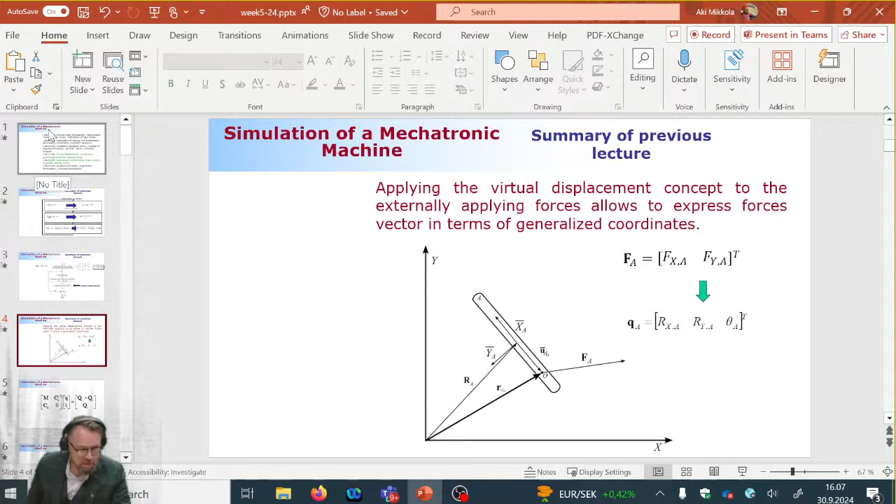Says what? You wish that? Ah, that would be fantastic. That would be really, really good. So then it will be just my head flying around.

Yeah, this is something that we can propose to university administration, that they need to get these green overalls and the green screen. That would be fantastic, so it's only the head that is floating. Hands, yeah, green overalls, that would be something.

Yeah, but even this is what we need to set up every single time. That green screen, even the green screens are missing in each of the lecture rooms. I don't understand why, because others are doing their streaming as well.

But yeah, okay, so let me see where I am here. So this. Oh, this is really good. That's really good. Yeah, the camera that is following me.

Yeah, oh yeah, this one is. Oh yeah, the cable is not connected. That's why. Okay, so let's see how we look in OBS. This looks good. YouTube.

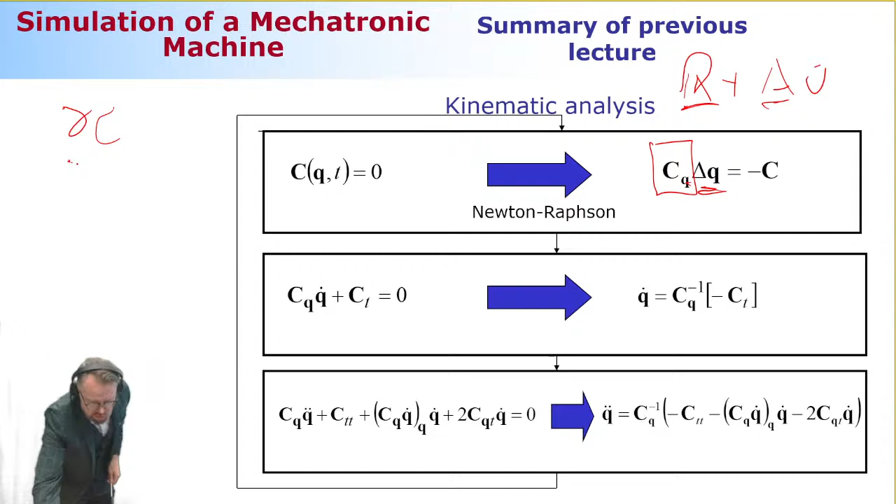And it works in a way that we compute something called the Newton difference. You can get the Newton difference once you've inverted your Jacobian. Here's another evidence that we have to have an equal number of equations and unknowns, because only in this case is the Jacobian matrix square in size. The Jacobian matrix - you get it by taking the partial differentiation of your constraints with respect to your unknowns.

You can only invert it if it is square in size. Then you're going to get the Newton difference. With help of the Newton difference, you can get a better guess to your position-level generalized coordinates. You redo it, updating your constraints and your Jacobian. You compute another Newton difference and get a better estimation. You do this until you're happy with how small the Newton difference is, or there could be a different kind of iterative process to close this out. But anyway, you do this until you're happy with the accuracy.

Then you move on to the next level, which is the velocity level analysis, the simplest of these three analyses, as it's only a simple substitution. Then you move on to the final level, which is acceleration level. That too is based on substitution, no longer as simple as the velocity level, but it's doable. So that's what kinematic analysis is about.

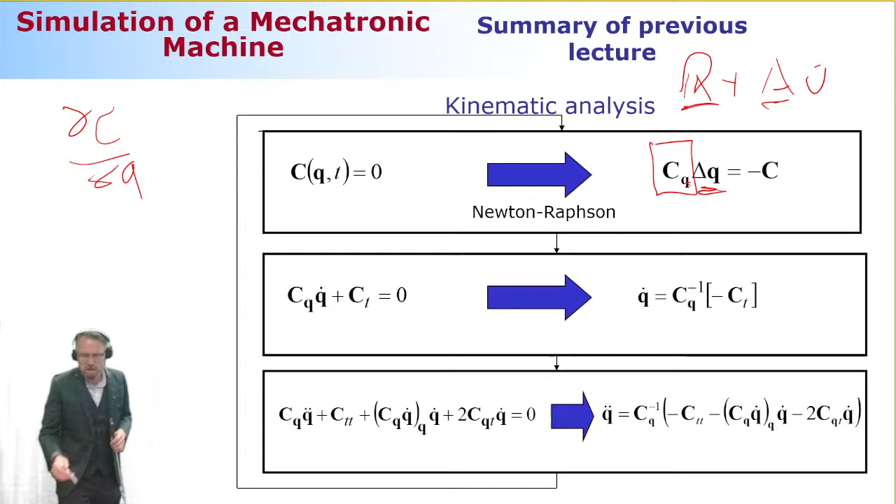And then you increase the time and redo it. So that's the way to solve it. This is the procedure at the position level, pretty much what I just explained, so I'm not going to do this again.

So then we moved to a completely different era, and that era was dynamics. We left kinematics behind and started to discuss forces. Remember, kinematics has no words about forces, it's just motion analysis. Dynamics is all about forces.

In simple terms, we have only two different kinds of forces. External applied forces, which could be like those coming from different kinds of actuators—hydraulic actuators, pneumatic actuators, electric drives—those are forces applied to the system externally. And then inertial forces. So these are the two different types of forces. In addition, we could also compute reaction forces due to the constraints, but let's leave those aside for now. Let's just consider that we either have external applied forces or inertial forces.

Now what we're going to do is set these two categories of forces to be equal, and that's going to give us dynamic equilibrium. Once we know the dynamic equilibrium, also known as equations of motion, we can solve these equations of motion forward in time.

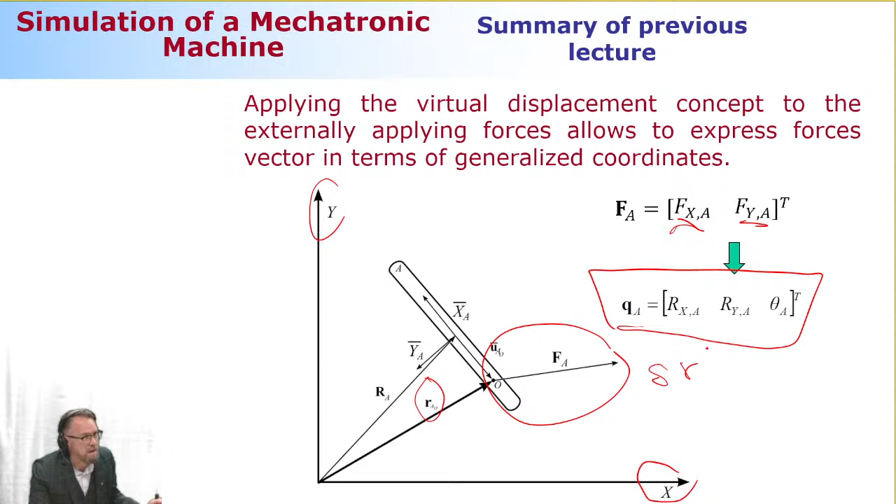What we're going to do here is introduce something called virtual displacement. With help of virtual displacement, we can create the relation between generalized coordinates and global coordinates. More accurately, it's actually the other way around, from global to generalized coordinates. It happens like this: once we introduce a virtual displacement to this guy here, we call it delta r, and we know that delta r can be written like this. Because of that, we know that r is a function of generalized coordinates, which in a simple case are rx, ry, and angle theta.

Okay, now following the mathematical rules, we can express this delta r such that it is partial r over partial q—this relation multiplied by delta q. Here's our relation. So this sounds like mathematics with no relation to real life, but yes, there's something important: this component here, this vector consisting of two components with respect to the global x and y axes—obviously the global coordinate system—can now be related to the generalized coordinates, and the relation comes from this partial differentiation.

Now with help of this mapping matrix, if you may, I can express this force in terms of generalized coordinates. There's going to be two in-class quizzes soon. First, I'm going to ask what the role of this mapping matrix is, that relates global coordinates and generalized coordinates—that's what it's doing for you. Then I'm going to ask you about a mechanism that is actually just one moving body—I'll give you several options, how is that possible?

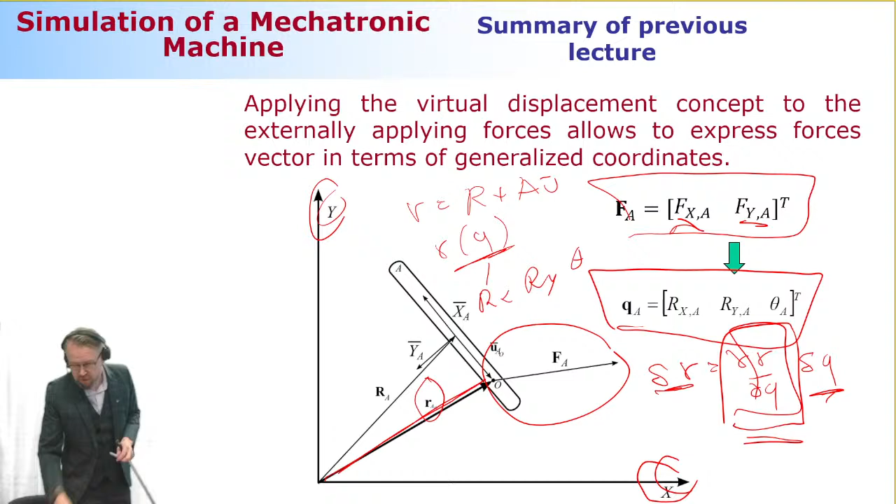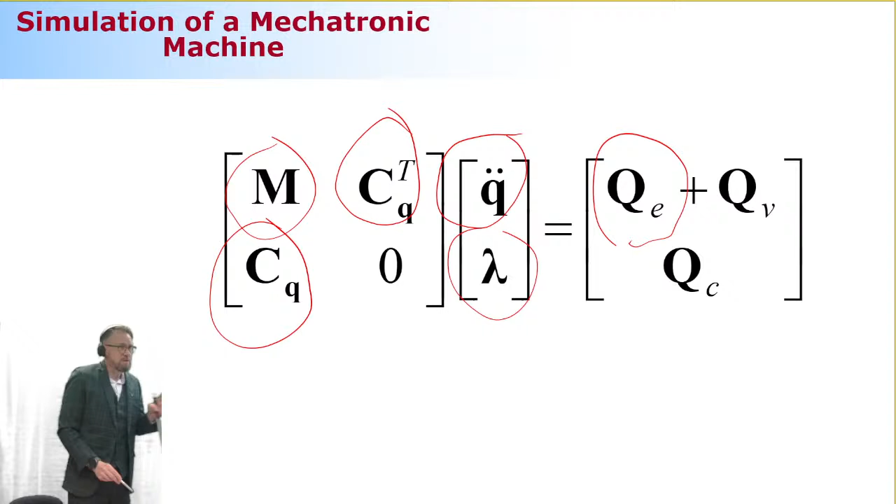We're still lacking a few components. We're still lacking this guy, which is a mass matrix. We're not sure what this Lagrange multiplier is, what its role is - we're going to introduce that next week, not this week. And then of course this one here, which is a quadratic velocity vector related to the mass matrix, let's say the inertia component. This is something that comes when we're converting this, when we express the equation of motion, so it's related to constraint equations.

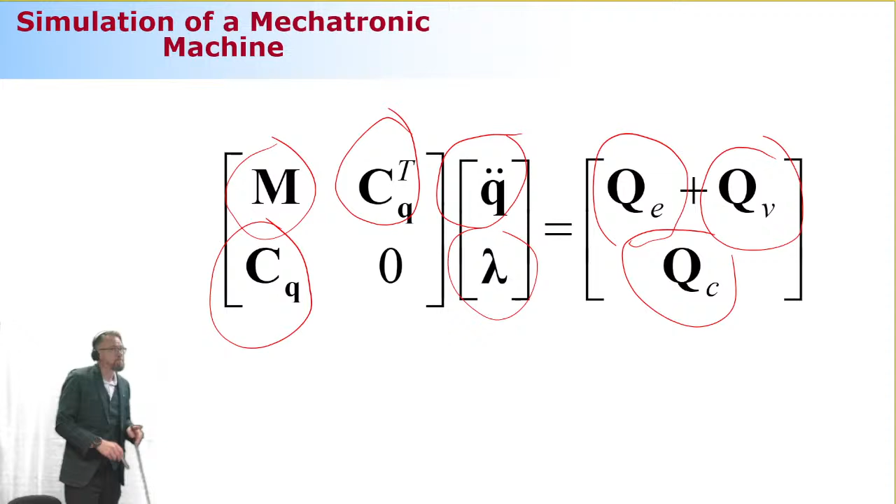Okay, those are the components. And now what follows is that we're going to redo the whole story about generalized externally applied forces rapidly, because I feel you need to hear this one more time. Once we're done, then we're going to practice it. Okay, one more time.

Here's the deal: we wanted to convert this force component to be expressed by generalized coordinates. We're going to do this using the concept of virtual work. The concept of virtual work is like this: virtual work equals the force multiplied by virtual displacement.

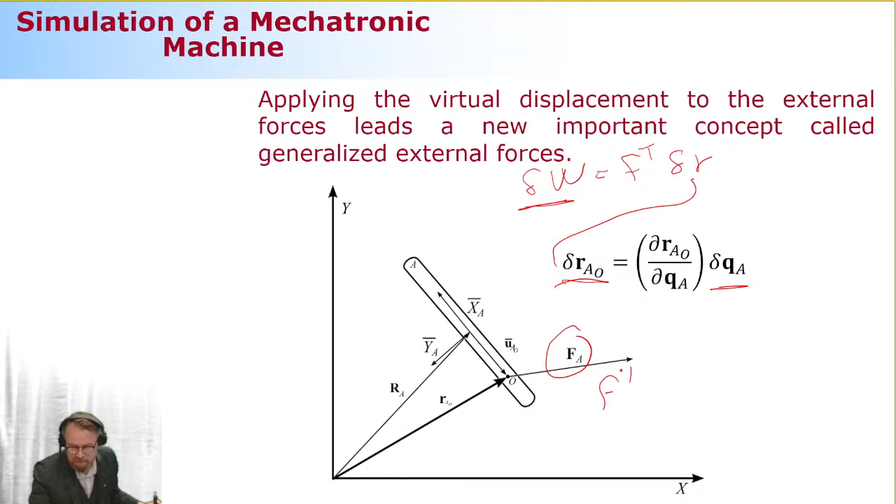A virtual displacement can be expressed pretty much like I just explained - there's a delta R, delta Q relation. Once you substitute this relation here, what's going to be left, and what's going to be your conclusion, is going to be like this.

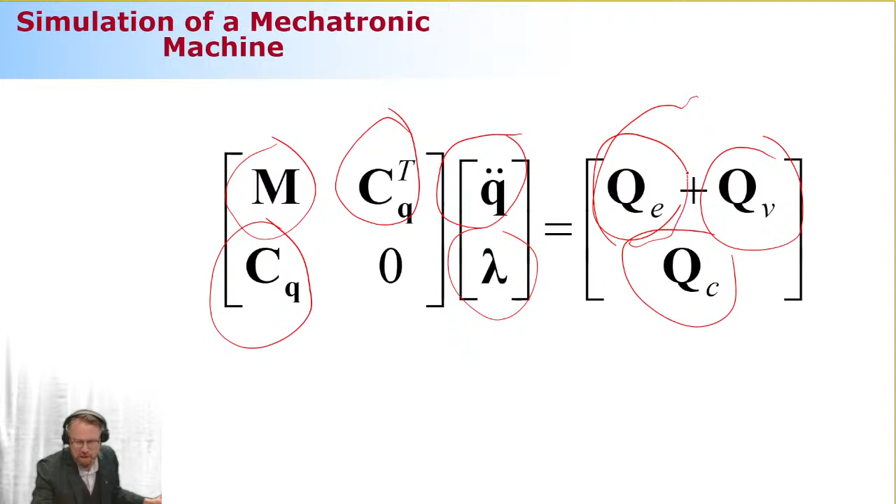Delta Q - now this component here actually takes your externally applied forces and expresses them in terms of generalized coordinates. So this is going to be called the vector of generalized external applied force. The one that you hear in the equation of motion is this guy, this one here. All right, so that's how it goes.

Now the middle step, or the component that is handy in the middle, is to do this differentiation. This mapping matrix, this magic mapping matrix, is partial R, partial Q, in detail as shown here, because this is going to simplify the notations in future.

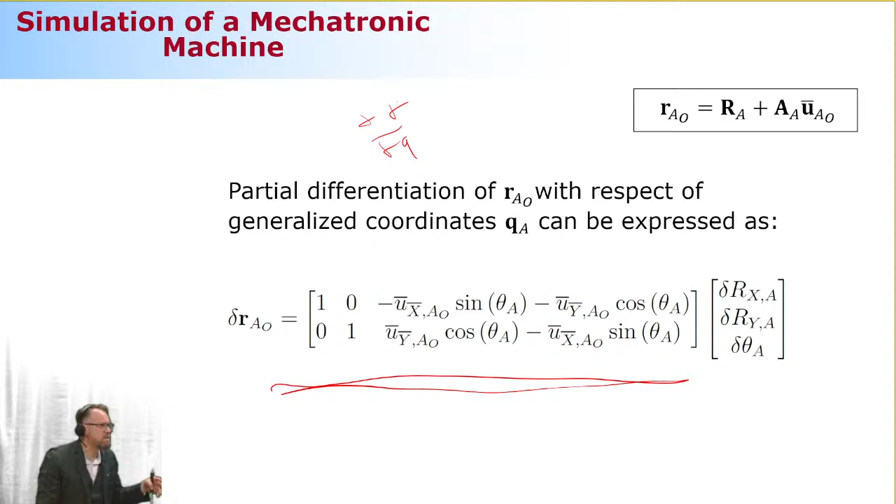And something that simplifies the notations in future is this matrix that we are actually familiar with. Remember, we met this guy when we discussed velocities. This is a rotation matrix, rotated 90 degrees in a positive direction. And then we have here vector U bar - this is a good friend of ours, so nothing new in that regard.

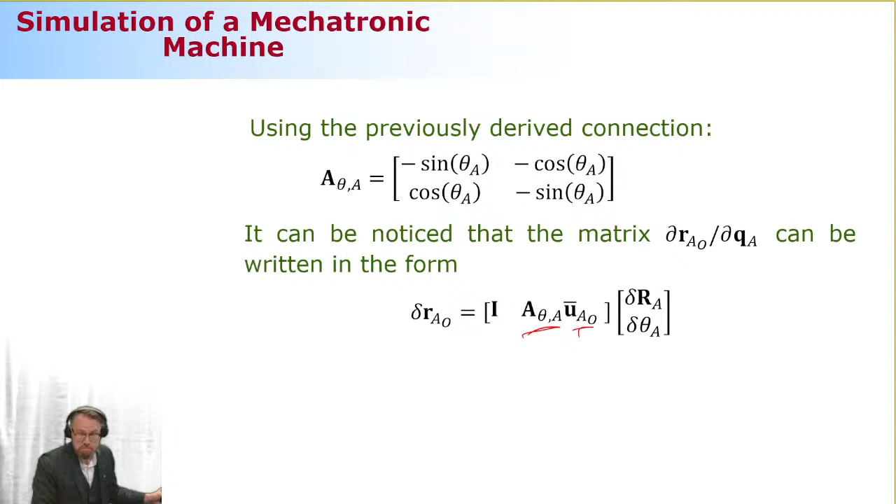That's it. Now once you multiply your force with this component, this is how it looks like. Now, a simple force component - give you an example like the beam-like component where gravity is applying here in the center of mass in the middle. This force will be expressed in terms of generalized coordinates, and how it's expressed depends heavily on where the body reference coordinate system is located.

Let's say that the body reference coordinate system is located in one end of the beam-like body, like here. What are you going to do then? You take this force and impose it to apply at the origin of the body reference coordinate system. And because there's a lever arm, this much, you take this lever arm into account by using this third component.

You see that this is vector U bar where the force is applying. This is the rotation matrix, rotated 90 degree angle, and the force. So this is obviously a moment that depends on how far off the force is from the center, or let's say the origin of the body reference coordinate system.

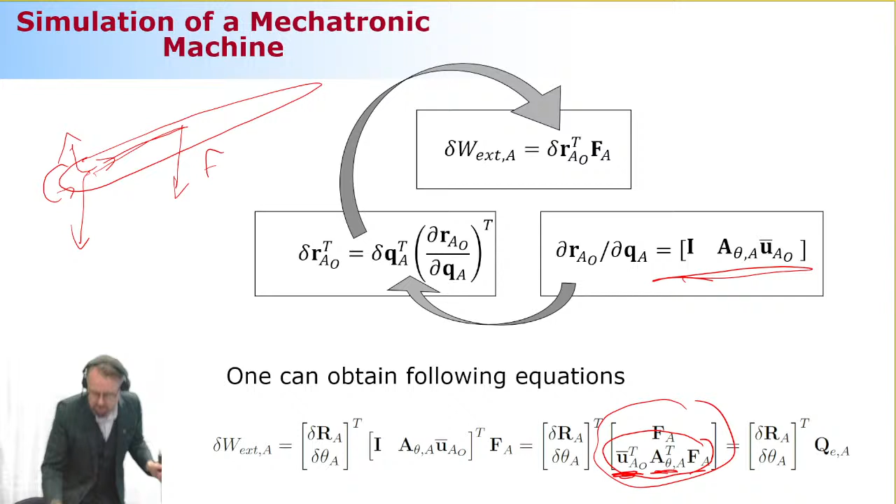So we're kind of moving the force applying at the origin of the body reference coordinate system, and we take the moment into account. And the moment is lever arm multiplied by the force itself. The moment is always a scalar component. This one here, when you do the math, it is actually a scalar component. This is a vector, exactly the one that the force is applying wherever it is applying. So that's what it is.

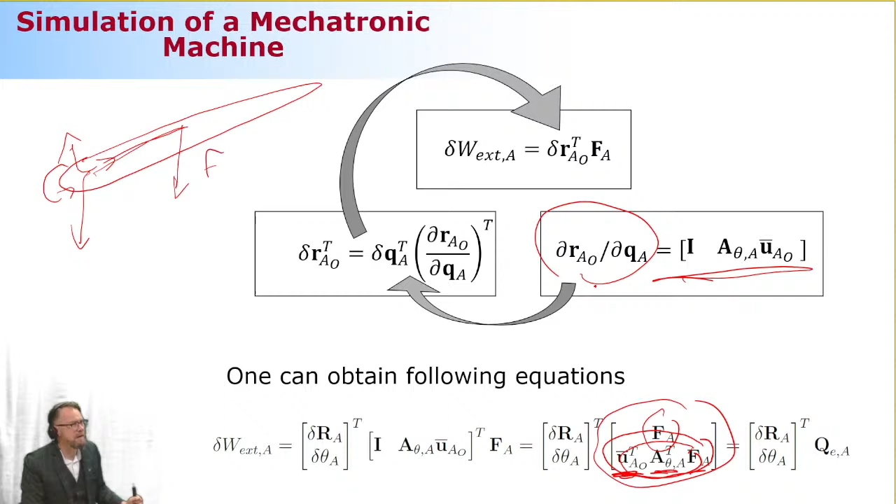So let's look at this one more time. The mathematical component was this guy here that relates global coordinates and generalized coordinates.

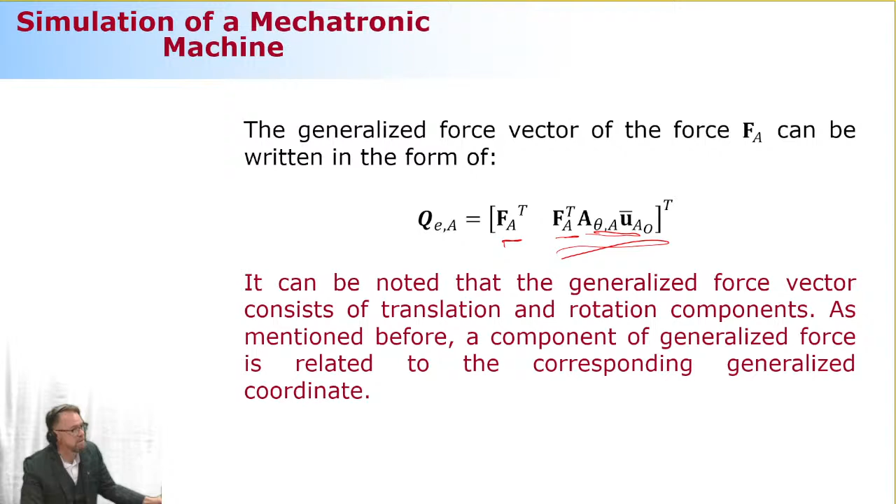So here are the forces. If I have the force applying at any particular point in the body or even outside of the body, these are the two force components, and this is the moment. So this is actually a scalar component once you do the math. It's clear because this is going to give you a vector, and this is going to be a vector. So what is left is going to be the scalar component, the moment. Maybe that's something you're more used to dealing with.

All right, so my first in-class quiz is this: physical interpretation of matrix, partial R over partial Q, in case of virtual work. The options are: defines relationship between global coordinates and constraints; defines relationship between constraints and generalized coordinates; defines relationship between global and generalized coordinates; defines relationship between external applied forces and constraints.

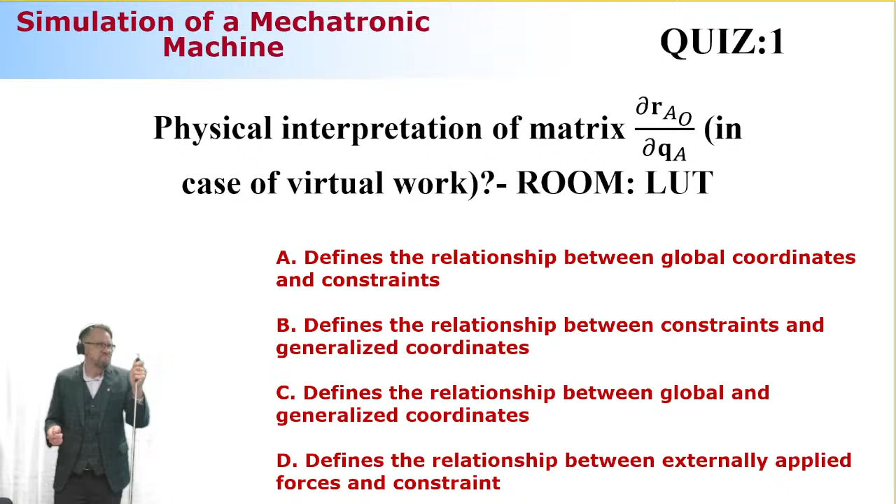All right, let me revisit that in a moment. Let me continue the story here. Let's look at an example. Here is an example which is pretty much what I explained to you. So I have here a beam-like body. There's gravity applying at the center of the beam-like body. And the body reference coordinate system is not located at the center of mass - it's outside of the center of mass.

Okay, so let's compute the vector of generalized forces. It's going to be obviously this force component as it is, the two first components. And then what is going to be left is the moment arm. Moment arm that is going to be a function of the rotation coordinate, obviously. Because if the body is rotating like this, the lever arm will be 0, as is also the case.

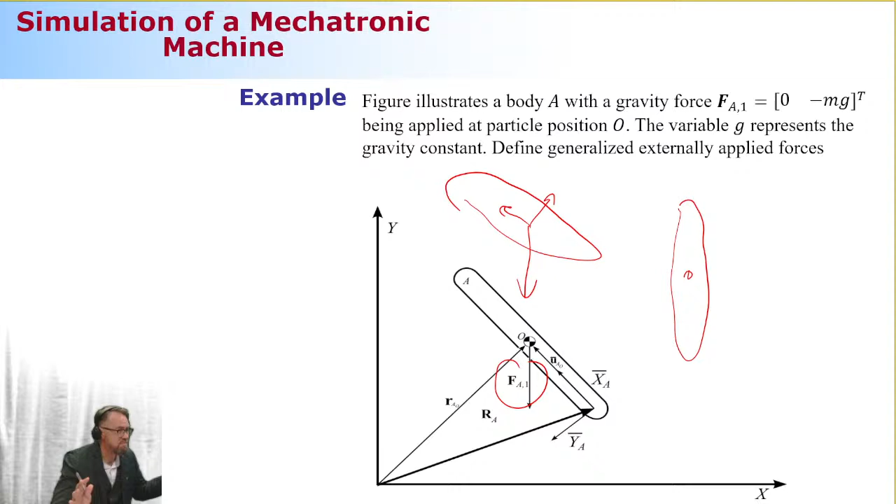If you think about it, there's a beam-like body, sorry about the low quality of the drawing, and the body reference coordinate system is located in the middle, and gravity is applying here. The moment arm will be 0, because the lever arm is 0. Okay, all right, so let's continue then.

All right, so here is the equation that I learned from the previous equation. So I have my rotation matrix that is rotated 90 degrees angle, and then the vector u bar. So this is a clear, simple matter of substitution. So once I do the substitution, I'm substituting the vector u bar into this equation. Vector u bar, by the way, because the body reference coordinate system is here, and the x-axis is pointing upwards, is going to be L divided by 2, 0. And once I do this substitution, my mapping matrix reads like this.

Once I do the math, you see that, okay, I got 0 component in the x-axis direction, which makes sense. Mass multiplied by the gravity constant as my y component, in the minus direction. And the lever arm, that depends on what the orientation is.

So how far off travels this force? If it is like this, it's going to be maximum length, which is L divided by 2. If it is like this, it's going to be 0 because it's traveling to the origin of the body reference coordinate system. All right, that's what it is. Now, what about this?

What about this case? What if I'm going to have the exactly same body, but the difference compared to what we looked at a little while ago is the fact that now the body reference coordinate system is located at the center of mass. So you need to take a look at how big the lever arm is, and then you need to pick an option where there's an appropriate number of components. Here's a hint.

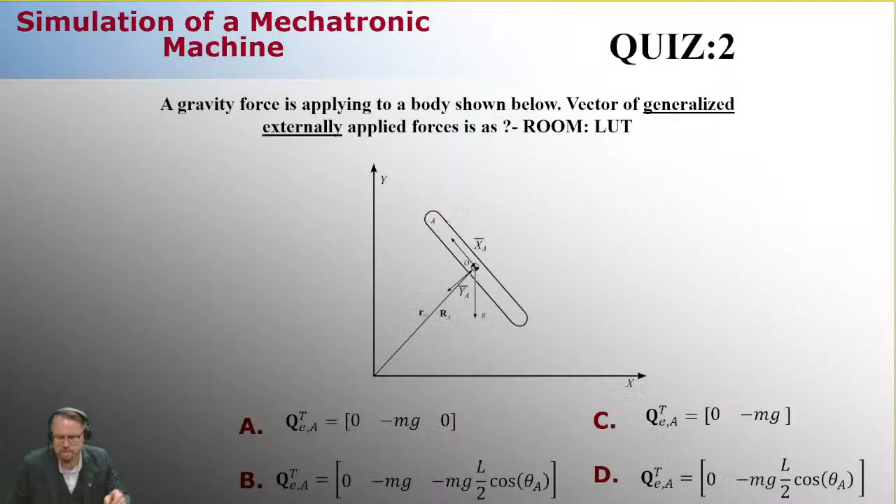Okay, let's continue then. Let me show you another example, and then we're going to move on to these inertia components. Ah sorry, this needs to be this order. So first this one, and then this one. Right.

Okay, let's look at another example. We have here a body that is triangular in shape. This is a little bit confusing example because forces that are applying in two corners of the triangular shaped body are expressed in terms of global coordinates. So you need to understand that they're pointing this direction no matter how is the configuration of the body.

It's pretty much like if you have here a point force like this. Even when I'm rotating the body, the point force still remains the same orientation. So it's like this kind of configuration. That's how it behaves, all right.

Now I have one force applying in a corner called A, and then another force applying in a corner called B. So what I need to do is express these points using the kinematics that I'm very much familiar with. I'm going to do this in a hard way - express this point and this point using this kinematic equation.

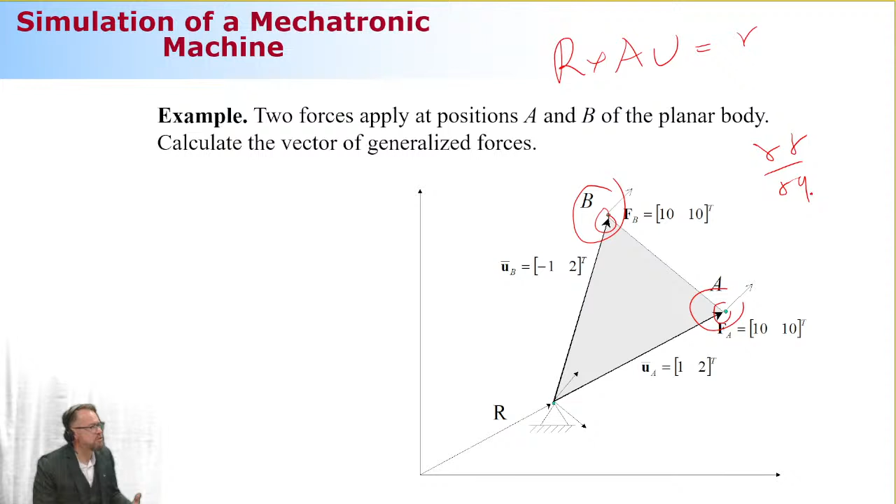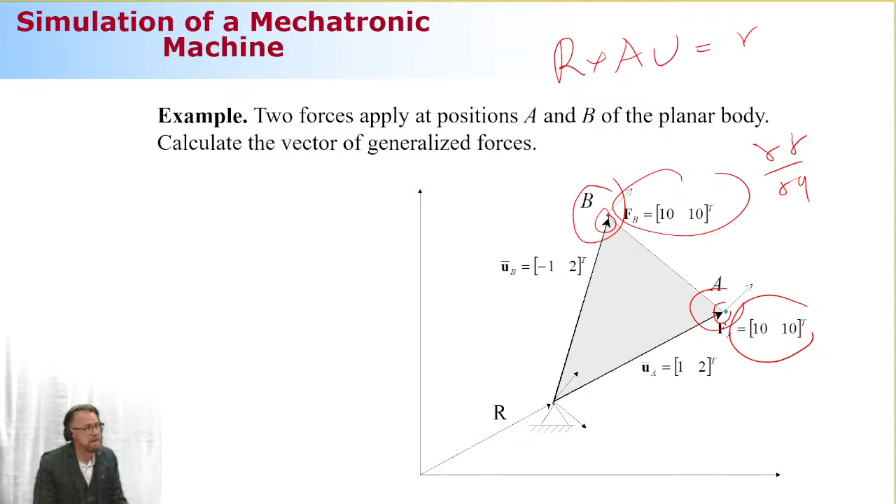What I'm going to do afterwards is differentiate this, which is called r, with respect to my generalized coordinates, and it's going to give me this magic mapping matrix. What is left to do is multiply my forces, this one and this one, by this magic mapping matrix. I'm going to get two sets of forces that I just need to sum up because they're applying in the same body. So that's what I need to do.

Okay, let's continue. The first thing will be kinematics at the point - this corner here, how can I get this? It's going to be very simple. I can take the components from the vector u bar, simply substitute it here, so 1 and 2, and then this is my rotation matrix, my A matrix. So this is the two components that I'm going to get.

Once I differentiate that with respect to my generalized coordinates - one more time, generalized coordinates are Rx, Ry, and angle theta - I'm going to get this kind of mapping matrix. This consists of 2 rows, 3 columns. 3 columns because of 3 generalized coordinates, 2 rows because of the 2 global coordinates.

Okay, now what is left is that I need to map my forces with the help of the mapping matrix. I'm going to get the 3 components - components as they are, and the lever arm, let's say the moment component, moment component would be the better way to say that. And that's it. Then I redo the same, but for point B.

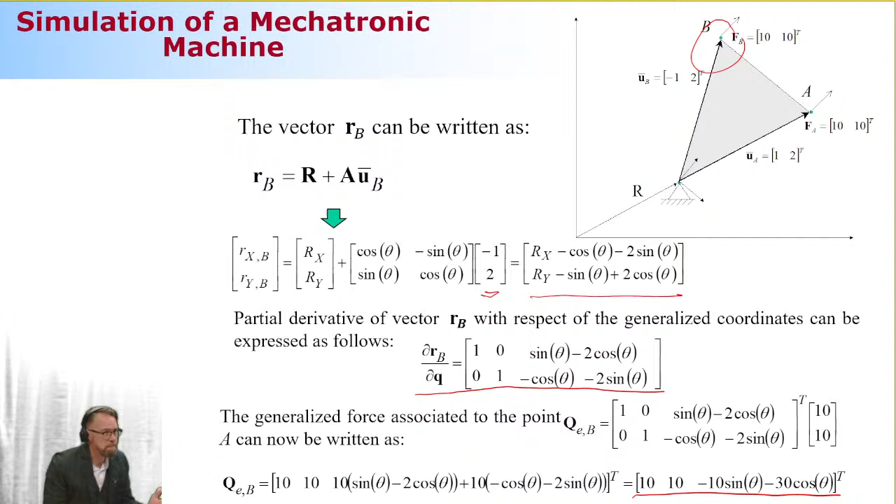The point B is located here. Actually, the only difference here is that the vector u bar will be different. So here's my vector u bar, and this is going to give me 2 components. Once I differentiate that with respect to my generalized coordinates, this is going to give me a second set of externally applied forces. They are applying in the very same body, so what I need to do is sum them up. Once I sum that up, this is how it looks.

My first component, second component. So this is my finally generalized externally applied forces. Very, very mechanical - take a look at the number of components, that's what matters the most.

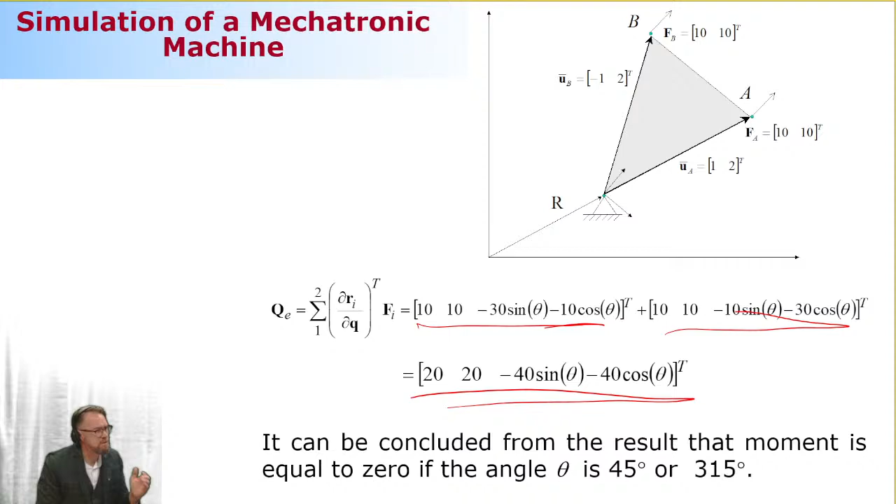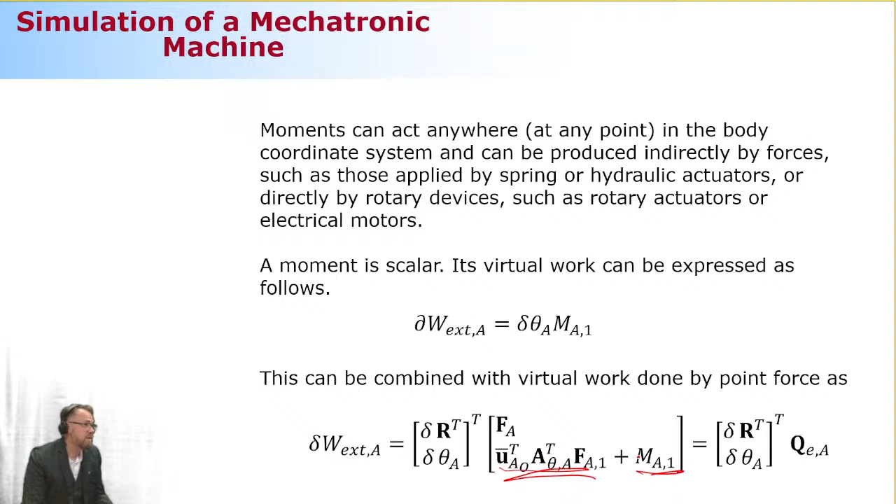Okay, simple thing - the moment. If there is a moment, that's going to be simple because any moment you have in your system, you just add that to your third component, your angular component. So a moment, that moment, you can move as you want. If you have any additional moment, you just sum it up, whatever is your lever arm. So it's a pretty straightforward component.

Okay, now, moment of truth. You guys ready to see something that is going to give you nightmares about this stuff, years in, years out, after I introduce this to you, because it's going to be so complicated that there's no limit. You're ready for that? You're absolutely ready for that. Okay, what about this? You still have a can-do attitude.

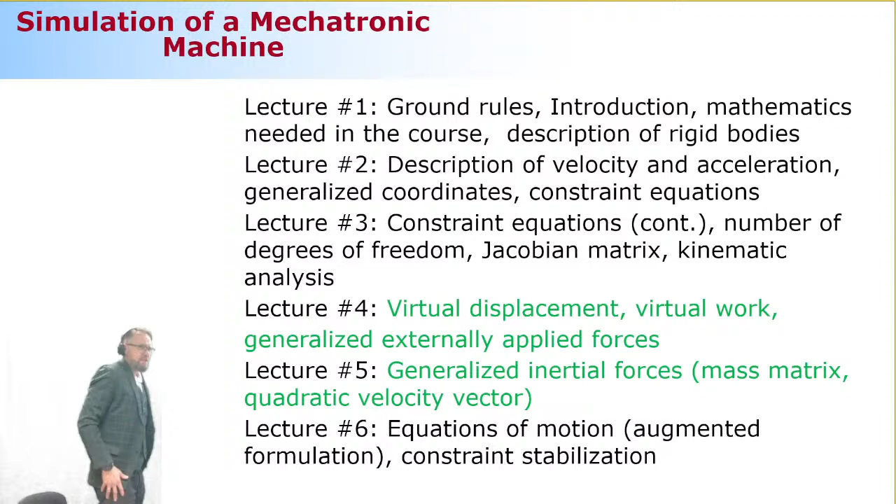Okay, so let's get into the topic. So it becomes to be this serious. Okay, so...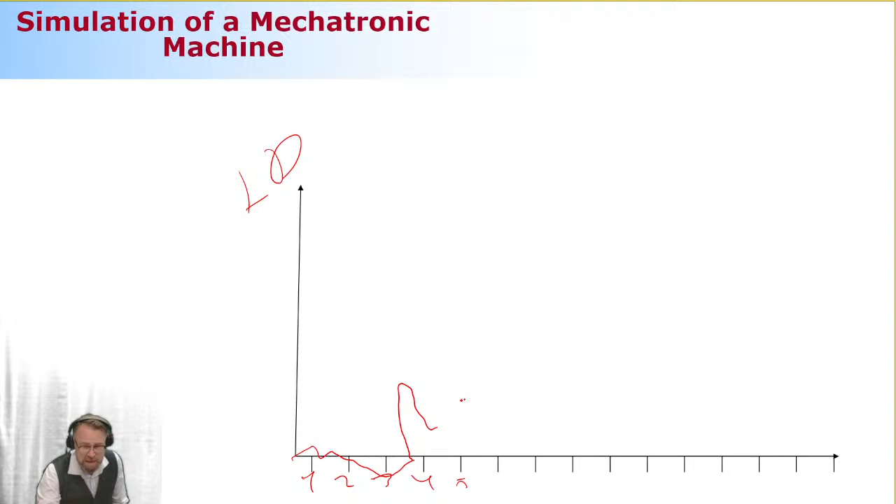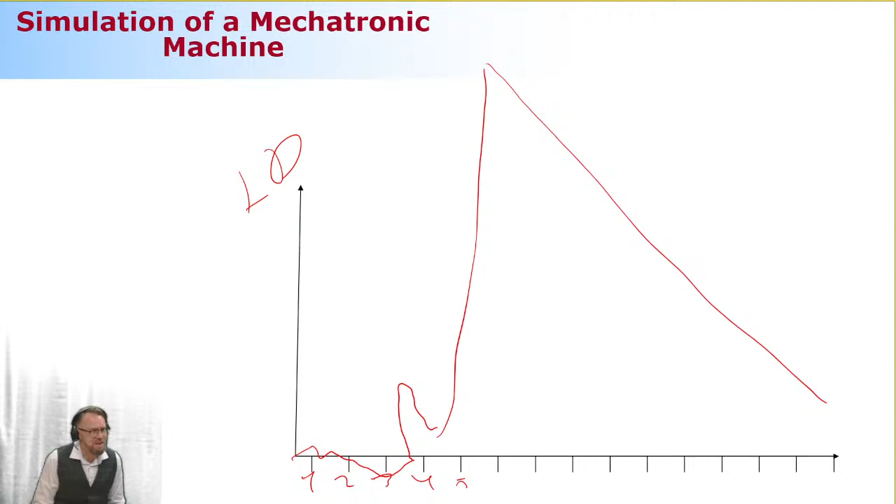Generalized inertia forces, that's what we're going to do. The concept, well, this is a level of difficulty, LD, level of difficulty. These are the lecture numbers, 1, 2, 3, 4, 5. We started like this, sometimes negative. This was a little peak because of the kinematics. And now here's a summit, we're going to go to the top of the summit, and the rest is like this. Very, very enjoyable, downhill all the time. Soft stuff.

Okay, here's a mission, this is what we wanted to do. That inertial force is, like we discussed earlier, mass multiplied by acceleration. Now, acceleration, sometimes you have seen this, that the force is mass times A, this is standing for acceleration.

And when you look at your lecture notes from your bachelor level courses, here instead of A, we're saying R dot dot, but there's no difference. And instead of mass, we want to show off about how good we are in physics and mechanics. So instead of saying mass, we say that the mass is equal to the integral over the volume of the body and the density.

That's going to be our mass. This is kind of important because remember where we started: there is a body like this, and the body consists of particles. So what we're doing with this volume integral is collecting the information from each of these particles. What we really want to know from each particle is its density - once we know that, we can compute the mass. This is maybe an overly complicated way to say mass, but just for the sake of generality, it is expressed as a volume integral. Okay, you're still with me?

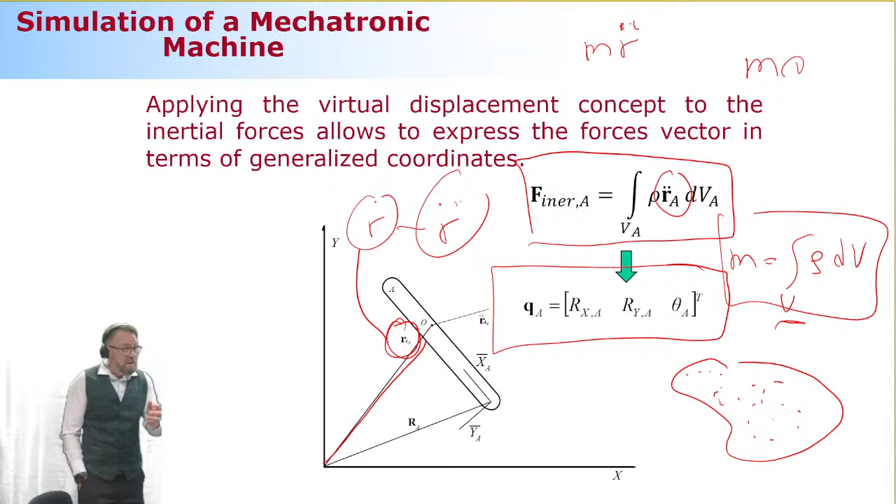So that's not what we're going to use here, because we have to convert this to be expressed using generalized coordinates. So how can we make this happen? Of course, we're going to use our good friend D'Alembert. D'Alembert, we discussed this earlier - what D'Alembert was saying is that inertial forces can be treated exactly the same way as external applied forces. Exactly the same way, really? So if that's the case, let's treat them exactly the same way. Let's use the concept of virtual displacement, virtual work for this other type of force, and let's compute how the generalized inertial forces relate based on that concept.

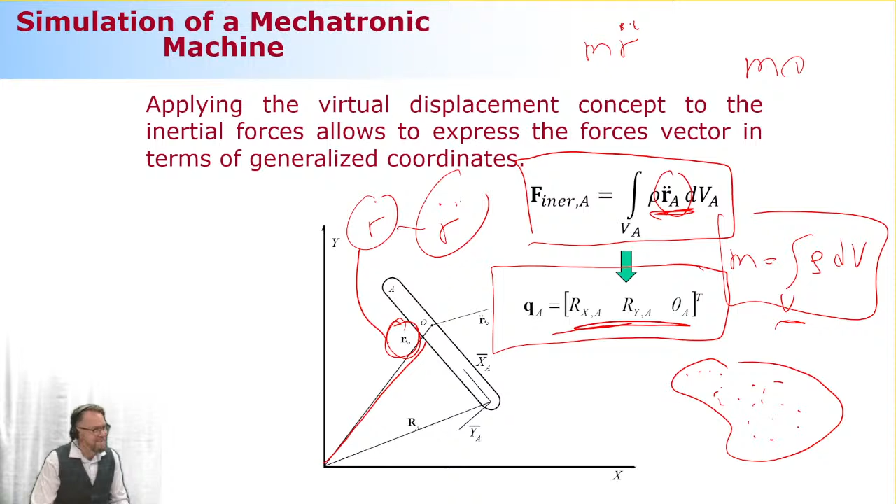So this conversion from 2 components here to 3 components here is going to be based on virtual work, virtual displacement to be more specific. Okay, let me take a look. So it's still a few minutes before the break - we're going to get started, then we're going to have a break, and then you guys relax and come back. But you know what we're aiming for here, you understand what we're aiming for today.

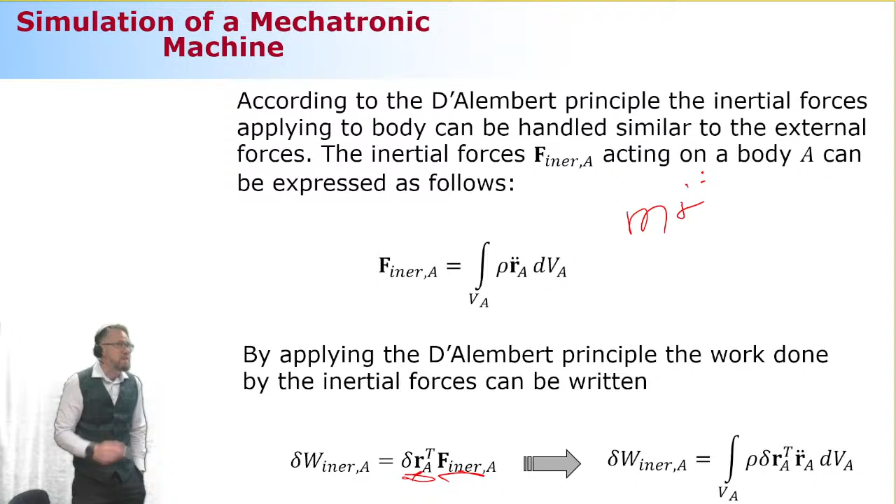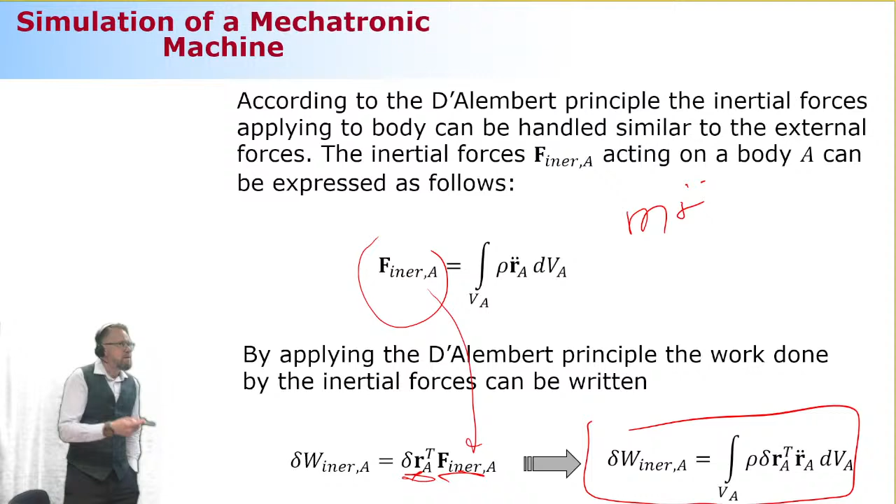Okay, that's clear. All right, so it's mentioned here that following D'Alembert's principle, the virtual work done by inertial forces can be expressed as virtual displacement times inertial forces. And inertial forces is nothing but mass multiplied by acceleration, like this. So I'm going to substitute that information here, and this is how my virtual work done by inertial forces looks like.

I continue my story. Then I'm going to use this relation between the global and generalized coordinates - this relation we discussed earlier, the one coming from mathematics that relates delta R and delta Q. The relation is this magic mapping matrix. So once I introduce this mapping, I'm going to get something called generalized inertial forces. And generalized inertial forces is the volume integral over the density, by the mapping matrix, and then acceleration.

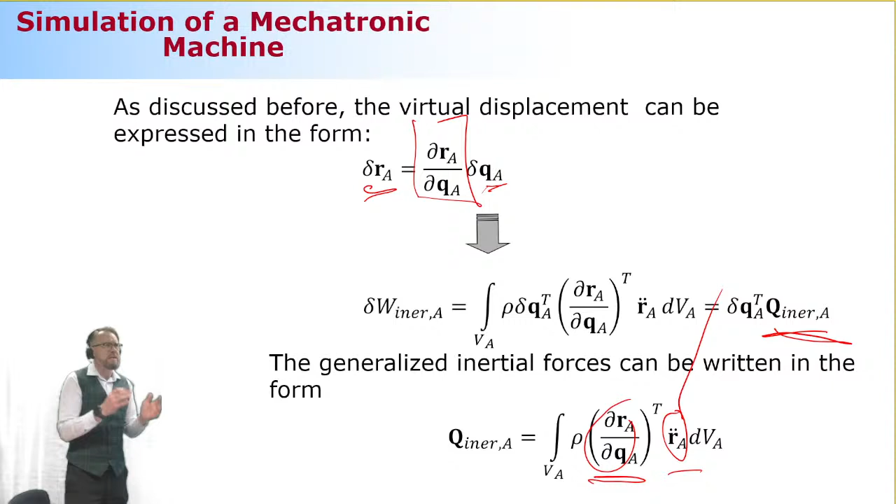Now this is not great yet, because what I'm after here is my generalized coordinates. And generalized coordinates are unpleasantly hidden in this component and here too, they are not explicitly expressed. This makes it hard to solve the equation of motion because I need them explicit. So I'm going to play with the math.

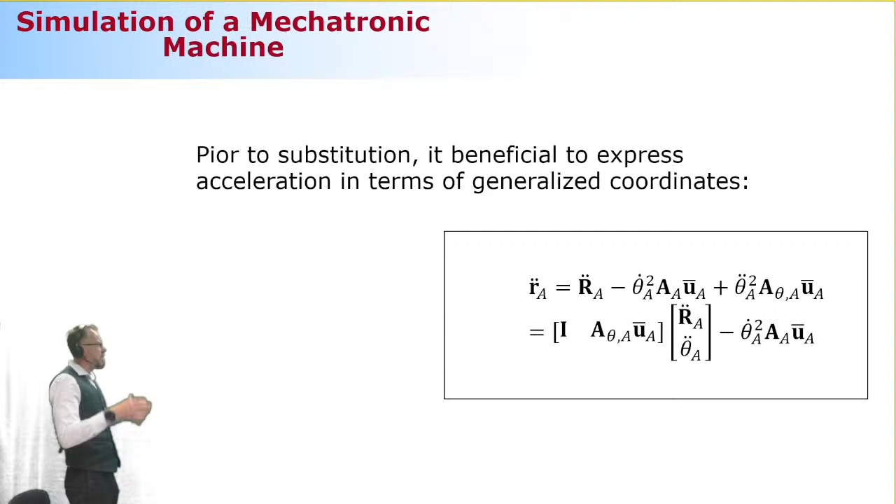First, I'm going to express my acceleration by reorganizing my different components. We learned, I think in the second class, that acceleration consists of three components: translational acceleration, and angular acceleration multiplied by this rotation matrix that is rotated 90 degrees, with the U bar. Oh, this is a typing mistake - the two definitely shouldn't be in this equation.

And then this one here - I think there is another typing mistake here, this one, my apology, because this obviously... Oh no, no, there is not. That's how it is. That's how it is.

Okay, now I'm going to express this by putting my generalized acceleration components as their own vector, and whatever is left will be a matrix multiplied by my acceleration. The last component left is the part quadratically related to velocities. So this is just reorganizing my acceleration, okay?

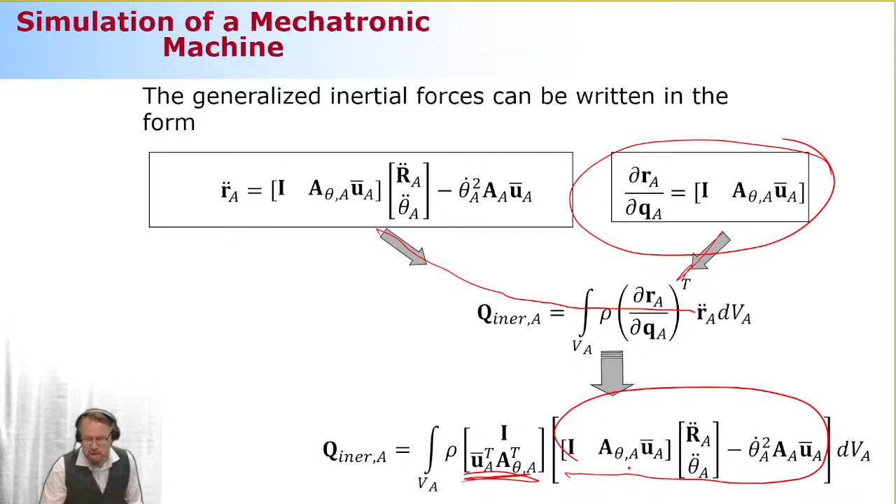Now I'm going to substitute this reorganized acceleration into this equation, and also substitute this mapping matrix. When I do this, this is how it looks - this is my mapping, this is my acceleration. When I do the math, there are two components: one called the mass matrix, linearly related to my accelerations, and something called the quadratic velocity vector. This is my generalized inertia forces.

You see the mass matrix is related to my generalized coordinates, so for one body, the mass matrix will have dimension 3 by 3. The quadratic velocity vector is something we don't need to worry about this time - let's get back to that later. There are ways to simplify it. For your information, the quadratic velocity vector becomes a zero vector if the body reference coordinate system is located at the center of mass. But it doesn't need to be there - certain commercial codes prefer not to put the body reference coordinate at the center of mass. That's their choice.

Okay, so that's what we're going to look at next. But first thing will be... guess what? Yeah, break. Let's have a break. Then we're going to look at what are the components inside the mass matrix, and how the quadratic velocity vector looks. That's going to be everything we need to do today.

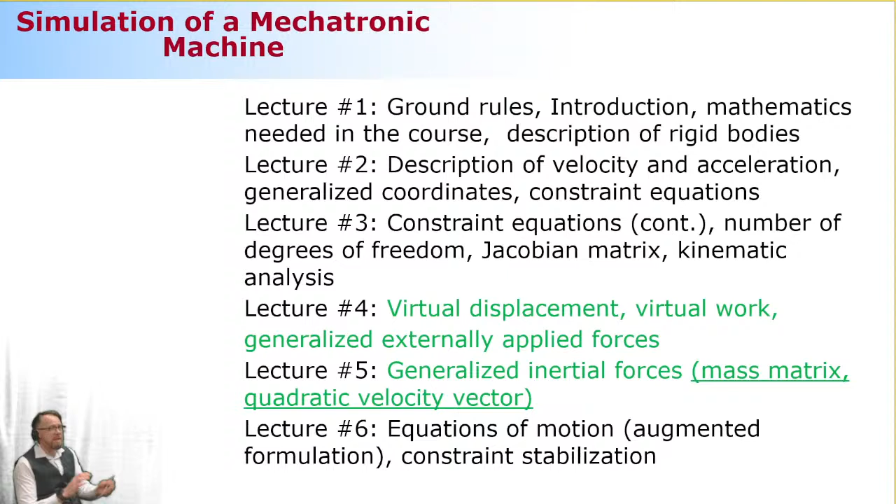There's going to be another in-class quiz about the mass matrix, a little something about the quadratic velocity vector, and then we are almost there - almost at the equation of motion. We are not far from that anymore. Remember, this is how the equation of motion will be written: mass, Jacobian matrix, Jacobian transpose, zero - this is acceleration, Lagrange multipliers.

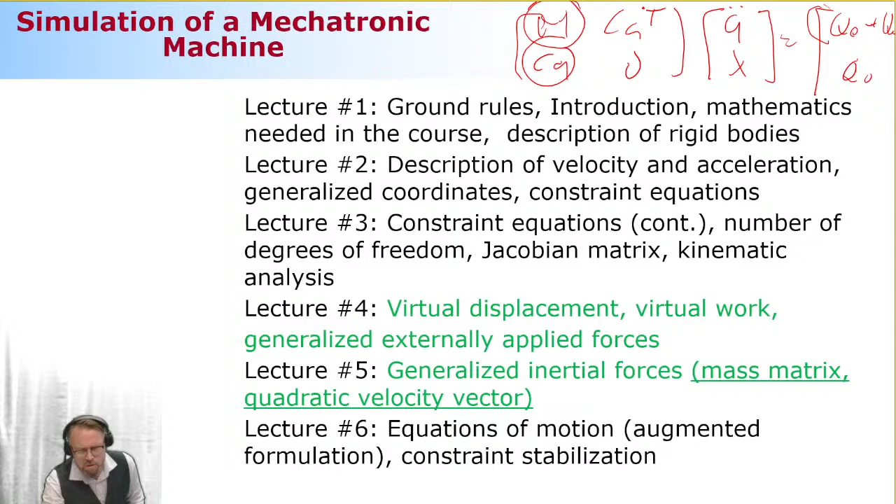Oh, I'm running out of space. We just learned this guy, we know this guy already, this guy already - this is what we know. We know this and kind of this too. So it's not much left. Almost there.

Okay, so how much time do you need to recover from this? Ten minutes, ten minutes. Okay, ten minutes and then we will be back.

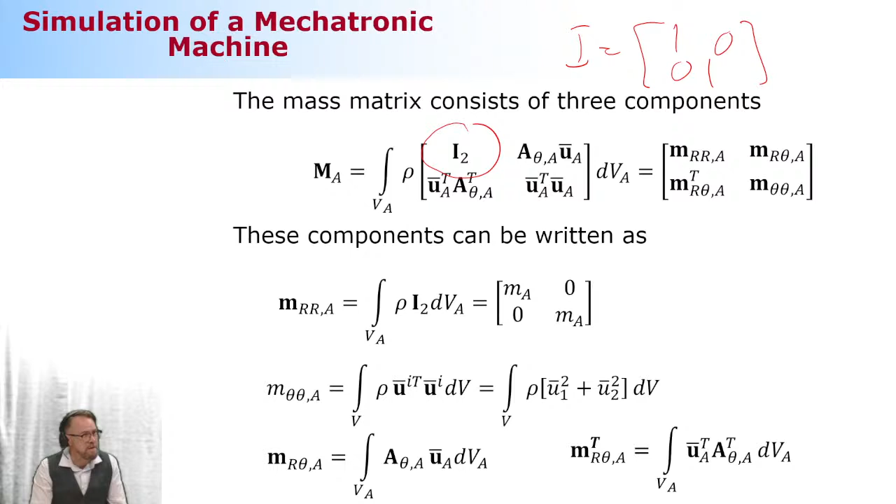So I wanted to explain about this mass matrix. The mass matrix has dimensions 3 by 3 because of the 3 generalized coordinates for each of the bodies. Now, what is located here in the upper left corner of my 3 by 3 matrix is called the identity matrix. The subindex 2 refers to this identity matrix having dimension 2 by 2. So this is obviously a matrix like this. Remember, the identity matrix is something where the diagonal components are equal to 1.

Off-diagonal components are equal to 0. So that's what it is, that's my identity matrix. But look at this: my identity matrix will be multiplied by the integral of the density over the volume of the body. Then there's going to be a component that combines translation and rotation. This has no clear physical interpretation. This component will be 0 if the body reference coordinate system is located at the center of mass, but it doesn't have any clear physical interpretation or clear name. It is related to the quadratic velocity vector.

And then the last component, which is actually a scalar component, is going to be something you all know. You've seen this multiple times before. If you look at the details of this component, it can be computed like this. This is obviously mass moment of inertia - how much inertia is resisting your motion.

A simple, famous case is this: if you have a beam-like body and the body reference coordinate system is located at one end of the beam, the resistance is much higher than if the coordinate system is in the middle. You can test this by taking a beam and rotating it like this, or like that - you can feel the difference. I can feel it easily because I have such big muscles, but I'm sure you guys can easily see the difference too.

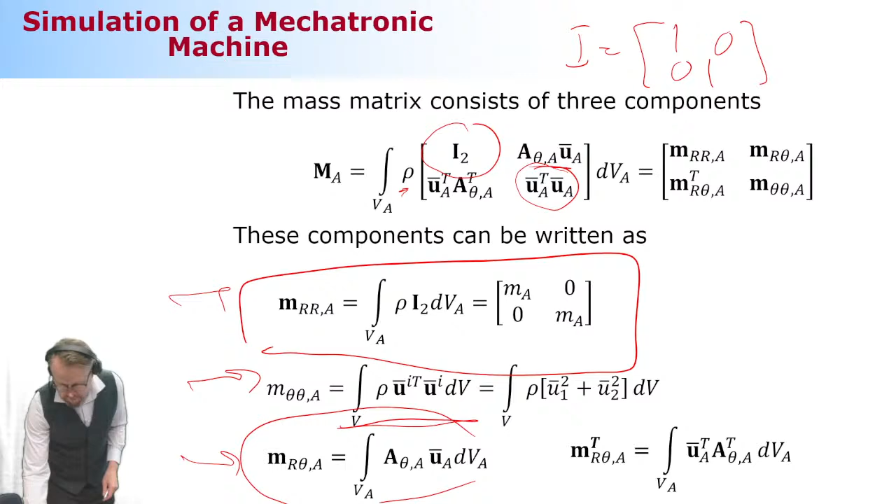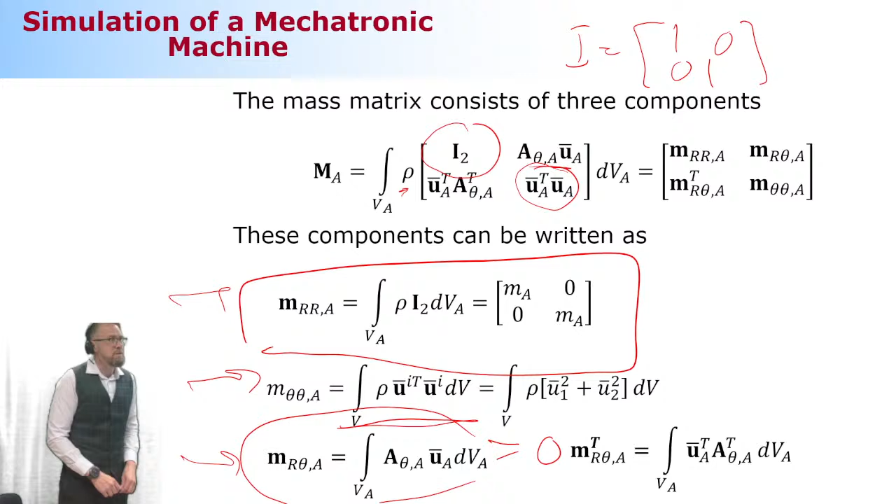Let's practice - let's take a box-like body and compute each of these three components. What I can already recognize is that the component relating translation and rotation is going to be zero. How do I know that? I know because the body reference coordinate system is obviously located at the center of mass. So this component here - actually a vector with two components - is going to equal zero. I can demonstrate that using these very sophisticated volume integrals.

Okay, let's do this the hard way. Let's do the volume integrals. I need to do that with respect to 3 axes because the volume consists of 3 axes. The first axis that is not mentioned here, because I'm dealing with the planar space, is width. So I'm going to simply put W here and multiply W with the density of the body. What is left is still my X and Y component axes.

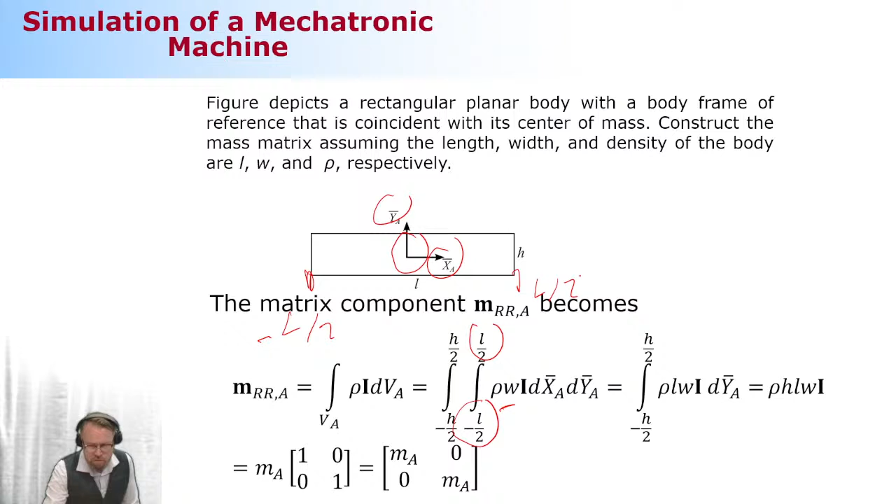So what I need to do here is take my volume integral such that the x-axis starts from minus L divided by 2 and ends at L divided by 2. The same with the H direction, minus H divided by 2 until H divided by 2. Okay, so that's what I need to do.

So I'm going to first integrate in the X direction, which gives me L inside of this component, and finally in the H direction, which is the Y direction, it gives me HLW. This is equal to volume, and volume multiplied by density gives mass. That's multiplied by the identity matrix, which is this guy here. So I'm going to get a 2 by 2 matrix where the mass of the body is located in the diagonal components. Don't do this the hard way - you don't need to torture yourself with the math.

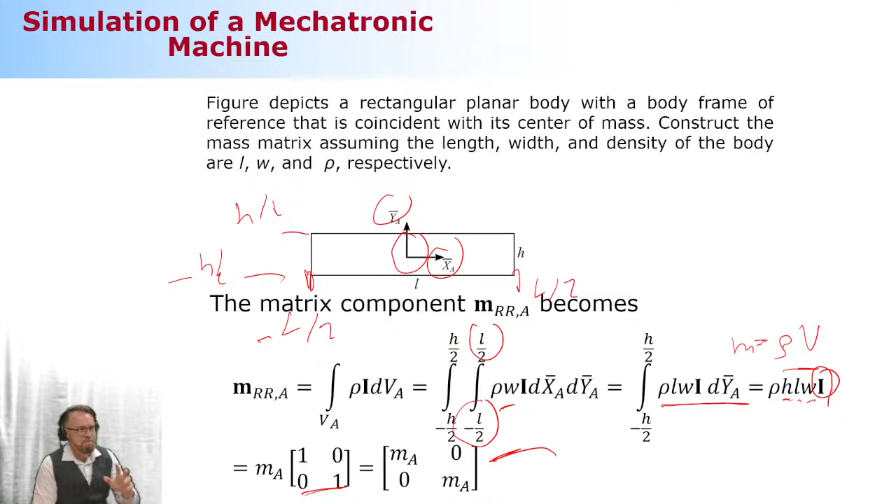You don't need to torture yourself with the math. Just take the mass, put it in the diagonal component, that's it. Okay, what about the component that is combining translation and rotation?

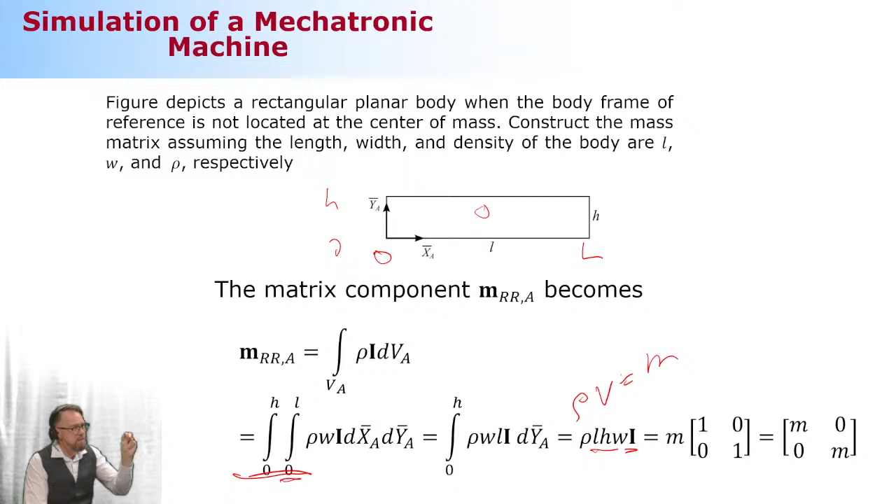Okay, so let's do it. Let's take the first thing, this component that relates to translation and rotation. Oh, this looks very, very bad. So I'm going to take this rotation matrix off from the volume integral. So what is left is this.

So then this, I'm going to simply integrate. I'm going to first take this W into account, and then integrate this from the X and Y direction. When I do that, it's going to be non-zero. Definitely non-zero, because this is like a linear component. A linear component from 0 to something is going to give me a non-zero solution.

Most of the dynamics you have studied so far, you have always made an assumption that the body reference coordinate system is located in the center of mass.

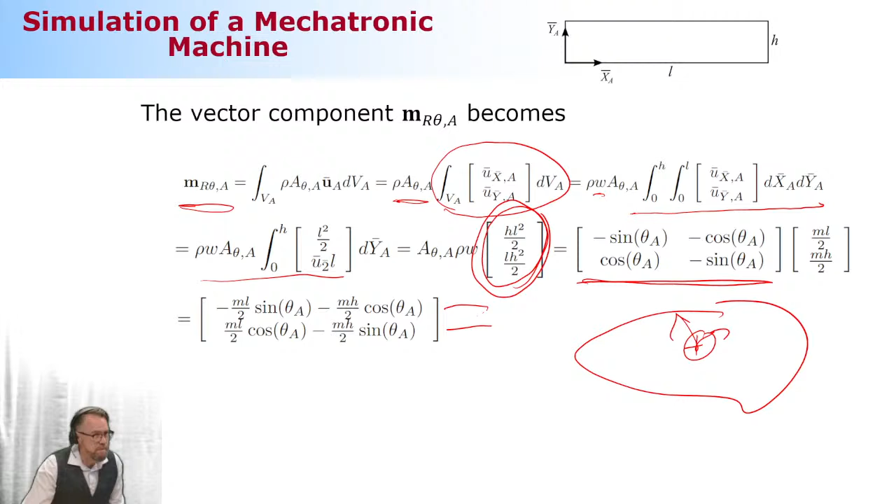Okay, so let's continue. Mass moment of inertia, same thing, so I have my vector u bar. Once I do my integration from 0 to L, 0 to H, I'm going to get this solution: mass divided by 3. Remember, in the previous case, it was mass divided by 12. So obviously this is bigger.

Nah, I wanted to put it like this. Yes, sir. So you can use just a...

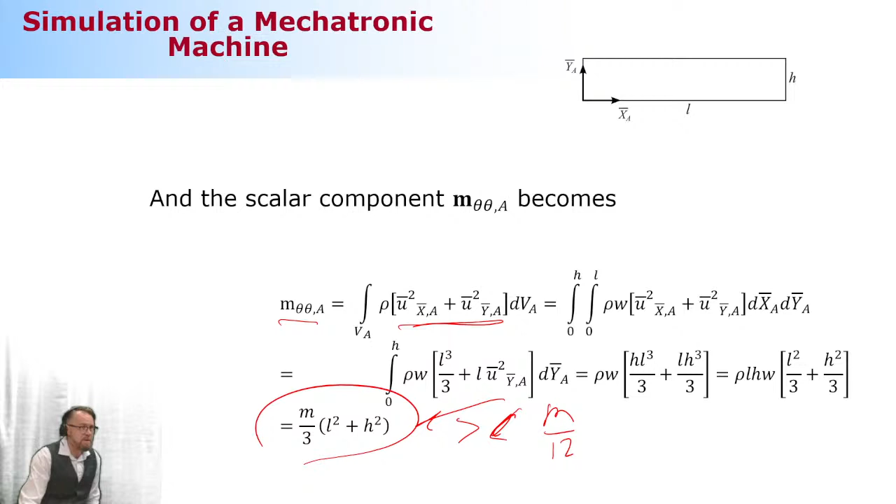Yes, you can use a pre-calculated table to get these values, because there are different kinds of handbooks about mass moment of inertia for different shapes of bodies. Use that, don't do this.

Most of them are based on the center of mass. Correct, but then you can use something that is called the parallel axis theorem. Parallel axis theorem, well, you know what it is - simply moving your inertia properties with respect to another location.

So parallel axis theorem - I got the shortcut in my brain. Because that has a different name too, but... yeah, something like that. Okay, let's call it parallel axis theorem. I think it's something like that. Yeah. That I have never heard. Absolutely never heard of that. But let's call it the parallel axis theorem.

But even higher, I think in some of the pre-calculated tables, they can give you the mass moment of inertia with respect to different locations. Like a beam-like body, it's a very common case. So it gives you, okay, what if it's going to be with respect to the middle or with respect to the end? If it's somewhere here, like 1/4 of the length, then you need to use a parallel axis theorem.

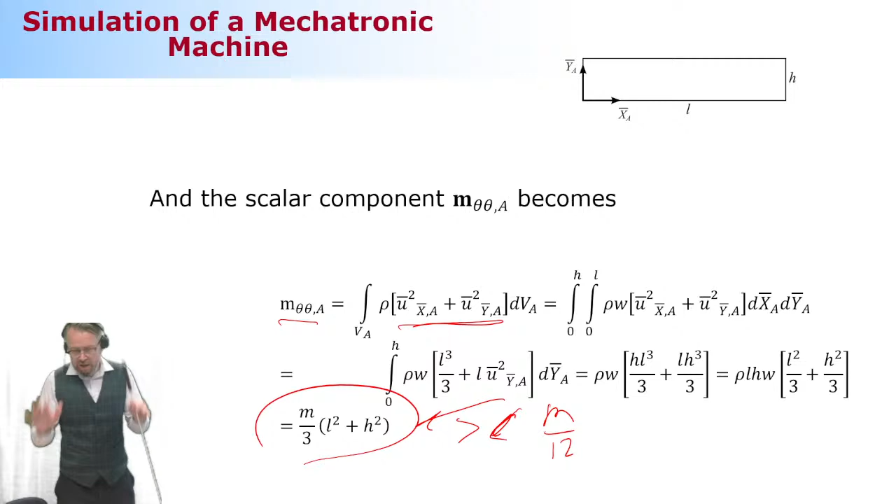Okay, here comes a very complicated question to you. Oh, not yet. So let me assemble these mass matrices.

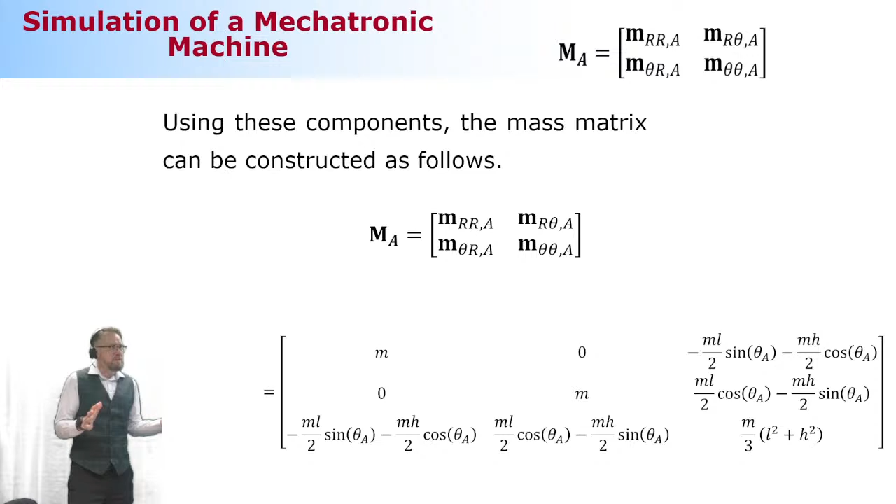You see that now this is no longer a diagonal representation because we have an off-diagonal component too. But again, the 2 by 2 submatrix is located here. This is my vector of 2 components. My mass moment of inertia is a scalar component located in the lower right corner of my mass matrix.

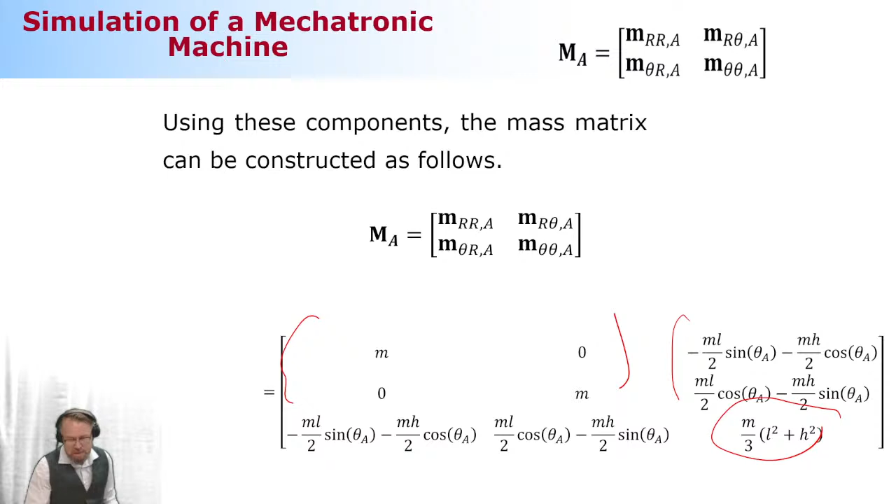Okay, so let me take a look at this one. Let me take myself back. Oh, you don't even see this.

Sorry, incorrect order. We're going to have a slower end of class because we have two in-class quizzes, this one and another one about dimensions again. Remember: everybody needs 3 generalized coordinates. That's what everybody needs. This is why the mass matrix always has to be 3 by 3. There's no other way. If it's a diagonal representation, that's only when the body reference coordinate system is located at the center of mass. If not, then there will be non-zero off-diagonal components. That's a rule of thumb.

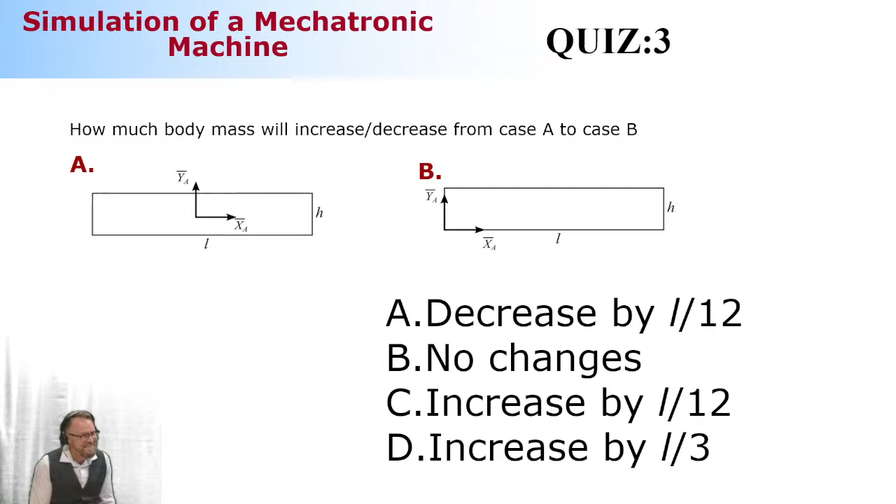You say. Okay, alright, so this is a high-risk game. I understand I need to be very careful because a 100% success rate is... I don't know, it's possible, it's very possible. But is it going to be or not? Okay, we've got 123 students. I'm actually a little scared to press this button. Can we leave this for next week? Let's leave it for next week. Let's skip this. Okay.

Oh! What the heck? This is unfair, you shouldn't listen to me. You should think about what to do after this class, like what about the Lakers, or how's my party going to be on Friday?

But it was a promise, coffee on me. I just need to figure out how I can organize that. Is this like the third time? Third time, yes. But the first time you guys get the coffee on me, so it's not going to be 3 coffees, just 1, here in the university cafeteria. I need to figure out how to organize that, because it's going to be... maybe I can get coffee coupons or something. And online participants, I don't know how I can give them coffee. Thank God they're online participants, I don't feel that bad anymore.

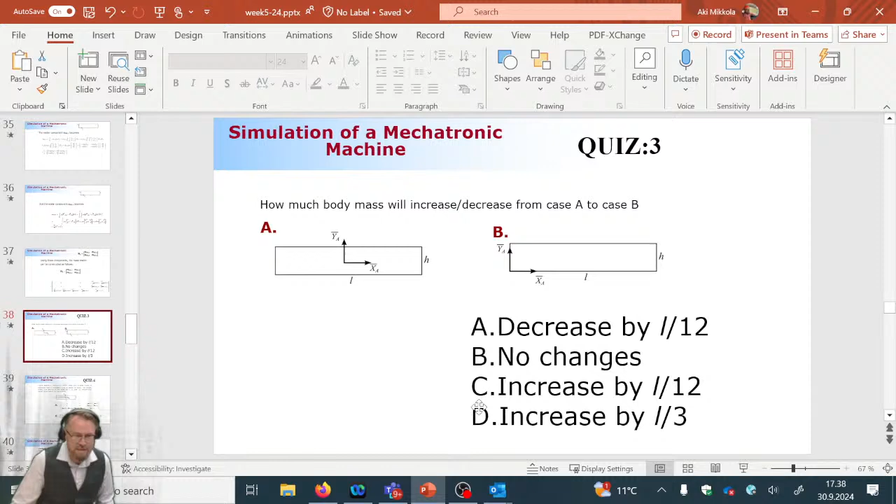How do you want to go about this? Do you want to go have coffee after the last lecture, or before the last lecture, or would you like me to hand out coffee coupons there? What's the way to go, before or after? Yeah, I'm going to ask - I will ask. Okay, so on WhatsApp, please ask how you'd like to get your coffee served, how you want to have your coffee. Okay, but for the second quiz, if you guys score 100%, it's still only one coffee, because you don't need to think about your stomach - coffee is not healthy if you drink too much coffee.

Okay, there's going to be another in-class quiz, I just need to move to that one. Okay, the last one. But seriously, I am surprised because usually people get very confused about this, mixing up body mass with mass moment of inertia. It's not as straightforward as you'd think.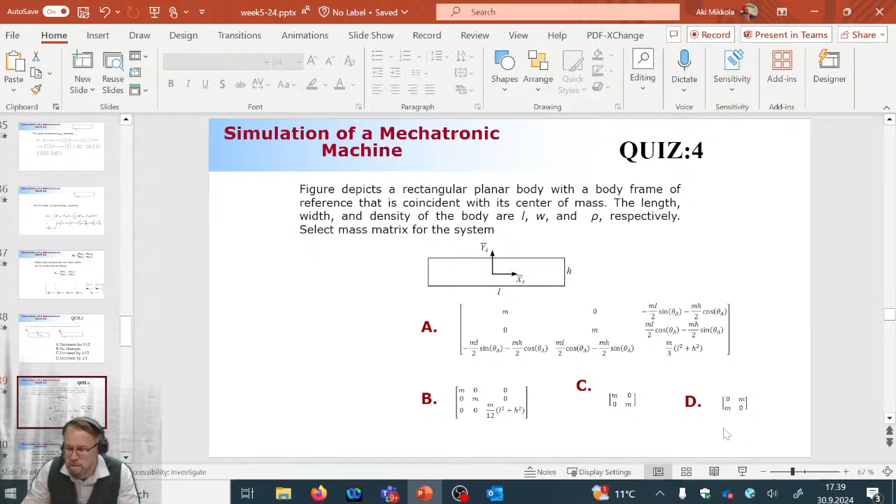So how's an answer? How would people like today's coffee to be served? Hold on, is it okay now? So, after last lecture it's going to be late. You're not going to sleep well if you have coffee that late. But I think we need to have it before that, because doesn't the cafeteria close at 6 o'clock? Is it so? The cafeteria, the one located this way, no, the street cafe. Yes, isn't that the one closing at 6 o'clock?

I'm actually very, very pleased to offer you a coffee because it's going so well. It really is going so well. Super happy to do so. Okay, but this one. What about this? Sometimes they say double or nothing. You want to go this way? Double or nothing, you know that's what they do in gambling all the time. So you win something, they ask if you want to continue, you can get double or nothing. Let's not go this direction, let's skip this one, and then there's something else.

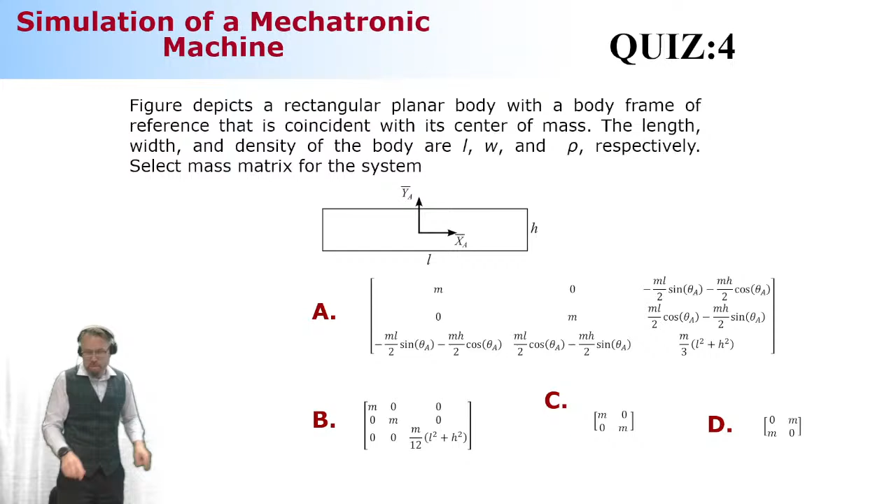The last thing I want to explain today, I'm going to get started right after this. Are you guys all done with this in-class quiz? Okay, so let me move on to the last subject matter today, which is the quadratic velocity vector. This is going to be the last component we need, and then we're ready to set the equation of motion. So we're this close to setting the equation of motion.

This quadratic velocity vector is, as the title implies, quadratically related to velocities. This is the component that came through the procedure we looked at earlier. So this is the one that is quadratically related to angular velocities. That's what it is. Let's look at the details and look at the interpretation of that.

So the component looks like this. I have this particular part that I got from my concept of virtual work, when I was expressing the acceleration the way I did. I have here angular velocity to the power of 2, and then the component here in the middle. Once you do this math, this is how you can write it. Now, it's extremely important to understand that this particular part is going to equal 0. You can verify this by looking at the lecture notes, where there's a detailed explanation of why this component becomes 0.

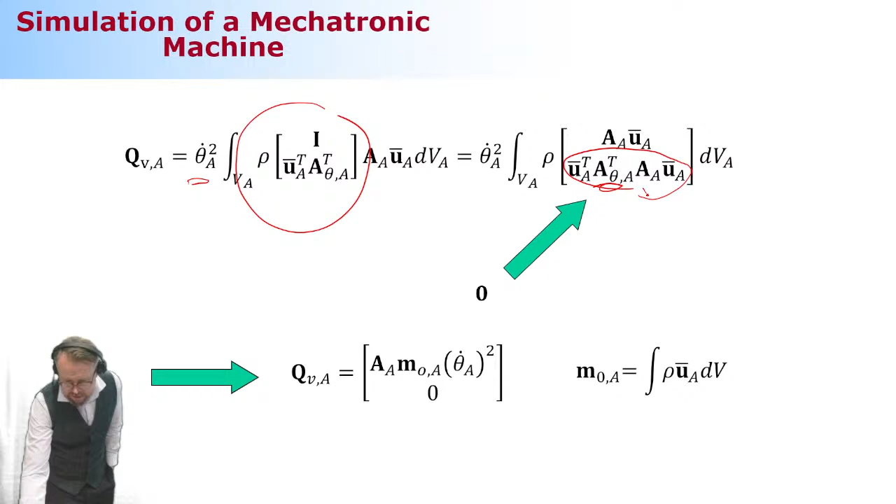This is simply because my rotation matrix is rotated 90 degrees from its original form, so they kind of compensate each other. When they do that, this particular part, which is a scalar component, becomes 0. What is left is the component associated with Rx and Ry.

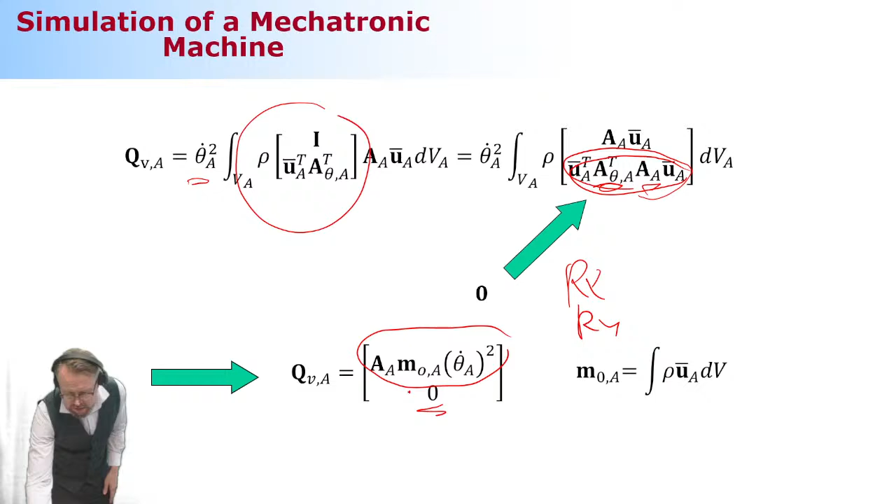Now, when you look at these components, they're kind of like the forces you can experience when the body is rotated. So it's like this: you have a beam-like body, and you're measuring the forces coming from this centripetal force. You have your body reference coordinate system located in the middle. Now, when rotating this, how much force will you experience?

Let's simplify this even more. You have a revolute joint here in the middle, and you're rotating this body. So how much is the force component in your revolute joint that is trying to rip this off? No forces—it feels nothing, because this is exactly in the middle. So when I rotate this bar, this is ideal, they cancel each other out. Remember, this is an ideal beam.

Jussi Sopanen would explain, okay, there's no such thing as ideal rotors or ideal beams—there's always a misalignment, this and that. But we have an ideal world, let's have it. Let's make our world simpler than Jussi Sopanen's world—Jussi wants to make his life miserable, very, very difficult. We don't care about these minor things, let's just say approximately no forces whatsoever.

But if you have a revolute joint at the end, and now you rotate it, can you feel the forces? Yes, you feel the forces. You feel that they really want to take this off, they really want to fly—like, of course I can handle it—but if it wants to go like this, the forces are preventing that from happening.

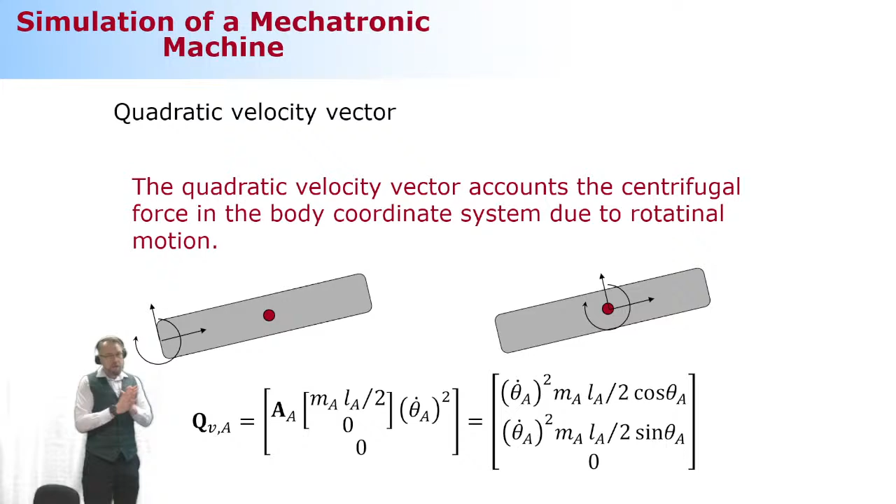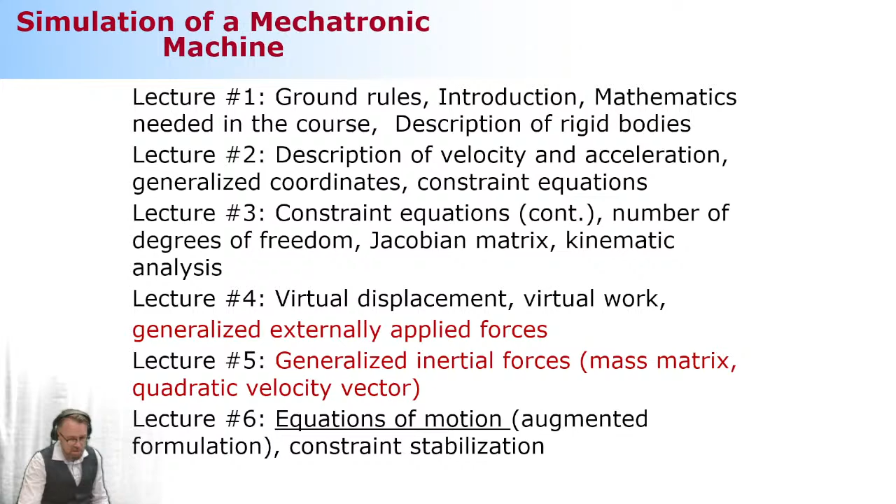Last thing I'm going to do today is move on toward the equation of motion. The equation of motion is going to summarize everything we've learned so far. There's an interesting thing I'll highlight to you, just a peek, and then we'll close the case for today.

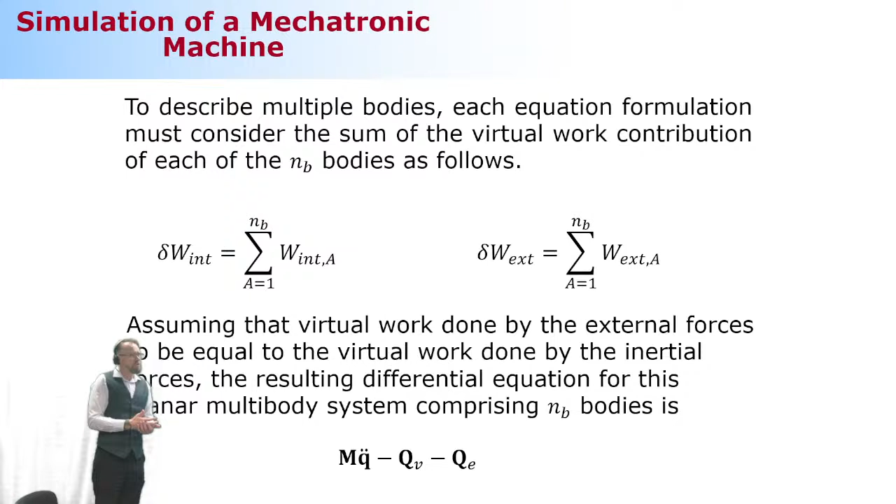Dynamics is different than, for example, the finite element method used in structural strength analysis. In structural finite elements, you're sharing degrees of freedom. In dynamic analysis, we don't — we're just adding degrees of freedom regardless of how bodies are combined by joints. We don't care about that. We already learned this: if we have one body, we need 3 generalized coordinates; with 2 bodies, we need 6, regardless of configuration or constraints between them; with 3 bodies, we need 9, and so on. We're always adding the number of unknowns.

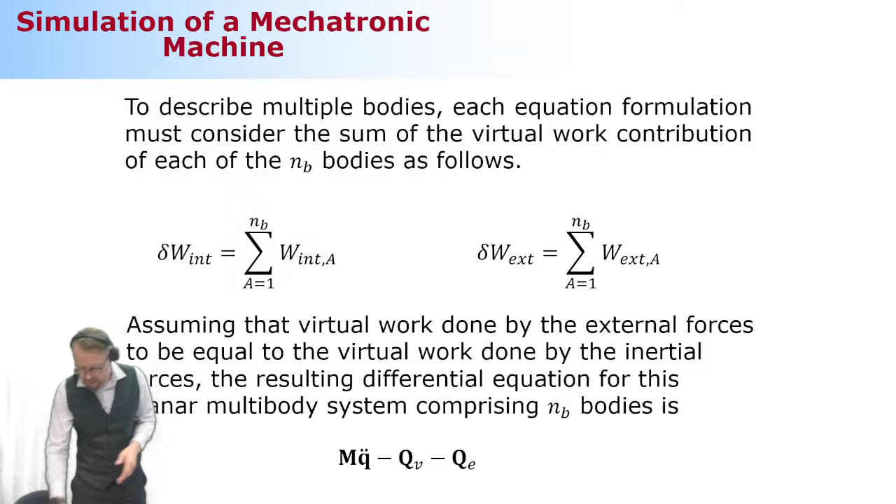And that's exactly what we're going to do — use a completely different concept than the finite element method, using a block diagonal representation of the system matrices. Block diagonal representation means the bodies are not sharing degrees of freedom. There's clearly one body, a second body, a third body, and so on, with no overlapping degrees of freedom, unlike in finite element modeling.

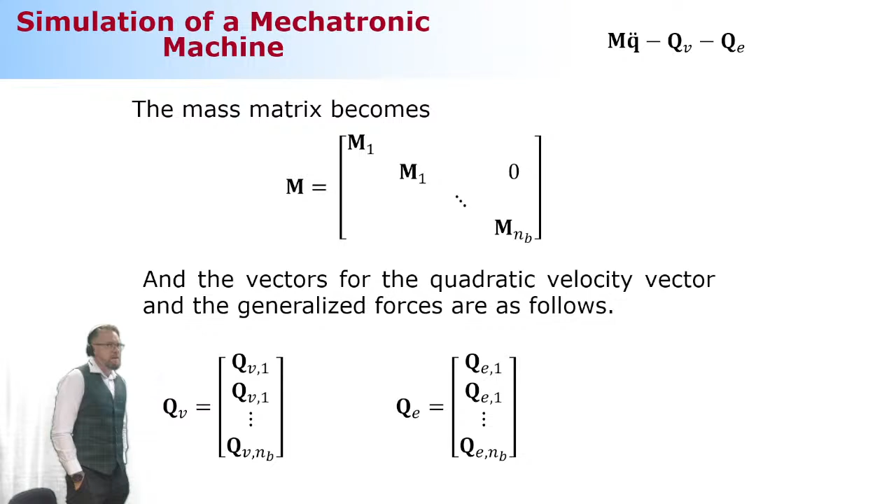That's what's going to follow next week, Monday. But let's look at how we're doing on the in-class quiz.

Is it going to be another fourth time at 100%? Let me see if I got a thumbs up. Not enough, I guess. 46 — is it 46 thumbs up? That's an all-time record. How much money am I going to get from YouTube because of this? Is it like 46,000 euros, or much less? Yeah, I guess it's less than that.

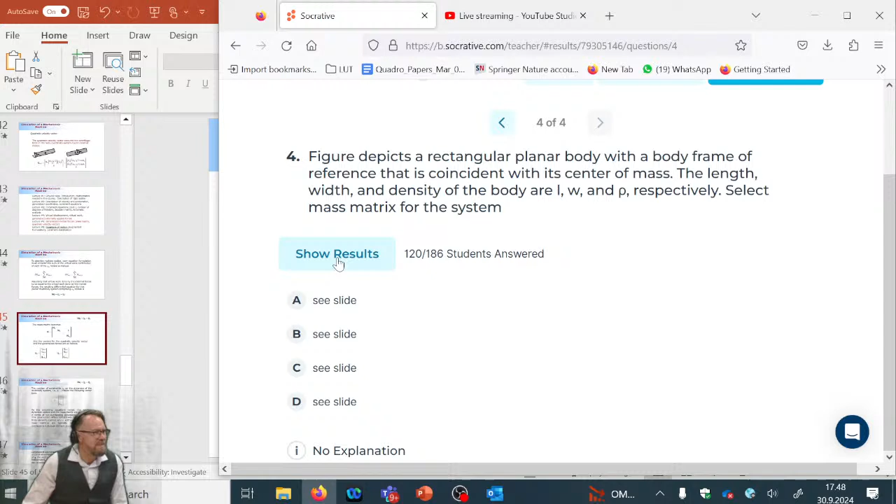Okay, but this is what I wanted to show you. We got 120 students. It was an expensive trick that I did, because 100-something students multiplied by a coffee cup, so it's going to be more than 100 euros. I don't care — my wife, let's keep this confidential information between you and me, okay?

How come this time it was again very high? I don't understand how you scored so well last time. I'm still very confused.

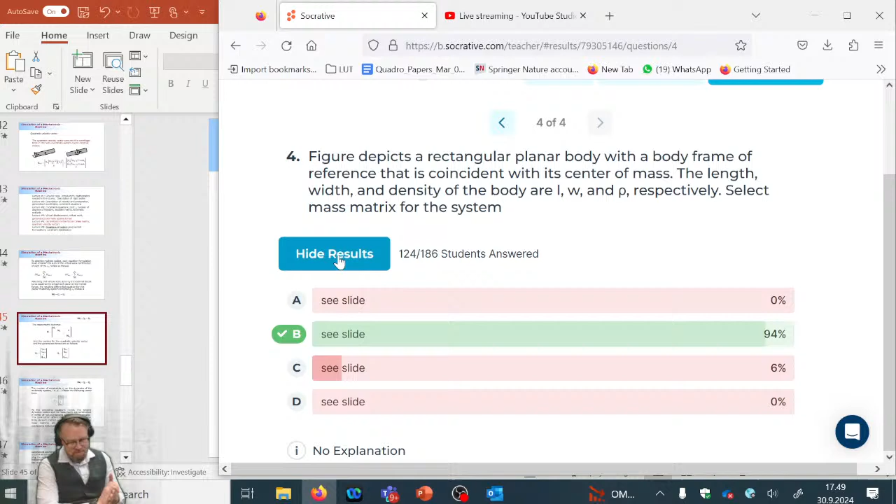Okay, that's all for today. We're going to continue from the equation of motion on Monday, and then we're going to start solving the dynamic responses. What's left is the summary.